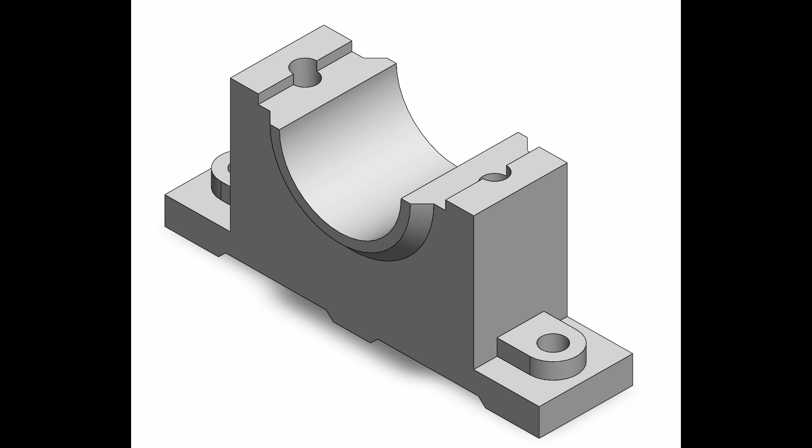Before we jump into SolidWorks, let's take a moment to understand our 2D drawing. The drawing provides three essential views: front, top, and side. These views help us visualize the part from different angles and ensure that we capture all necessary details. Pay close attention to the dimensions provided, as they are crucial for creating an accurate model.

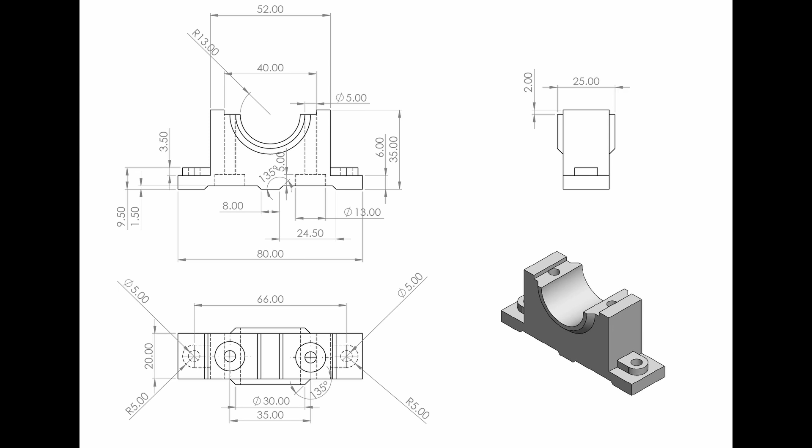Let's open SolidWorks and start a new part. Select the front plane to begin our sketch. Using the line tool, we'll draw the initial shape based on our 2D drawing. Make sure to add all necessary dimensions and relations as shown.

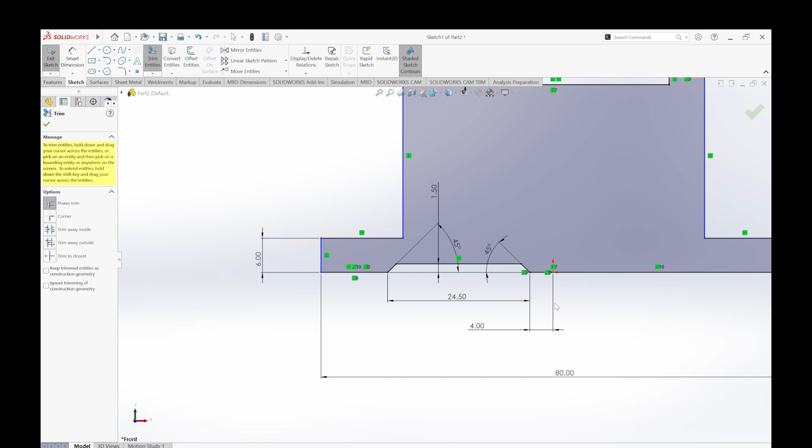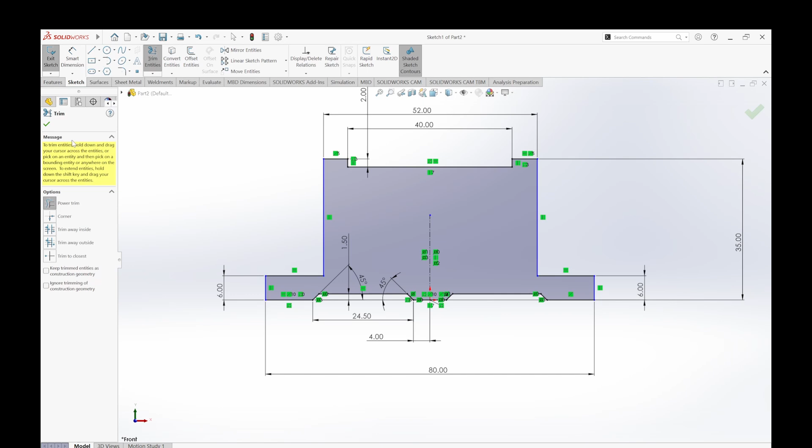To save time, we'll use the mirror feature to duplicate parts of the sketch. Once done, we'll trim any unnecessary lines to clean up the sketch. With our sketch complete, let's move to the Features menu and select Extruded Boss/Base. We'll set the thickness to 25 millimeters to give our part its initial 3D form. This extrusion will serve as the foundation for the rest of our design.

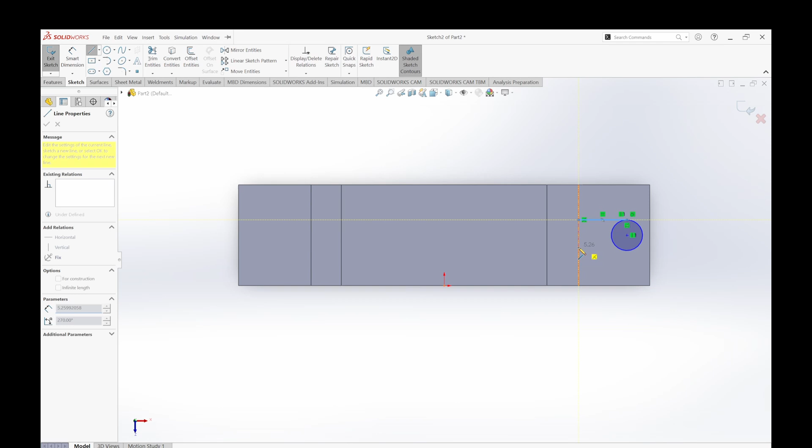Next, we'll select the top surface and sketch two circles. The larger circle will have a diameter of 10 millimeters, and the smaller one will be 5 millimeters. We'll also add two lines to complete the shape. Don't forget to apply the necessary dimensions and relations to match the 2D drawing.

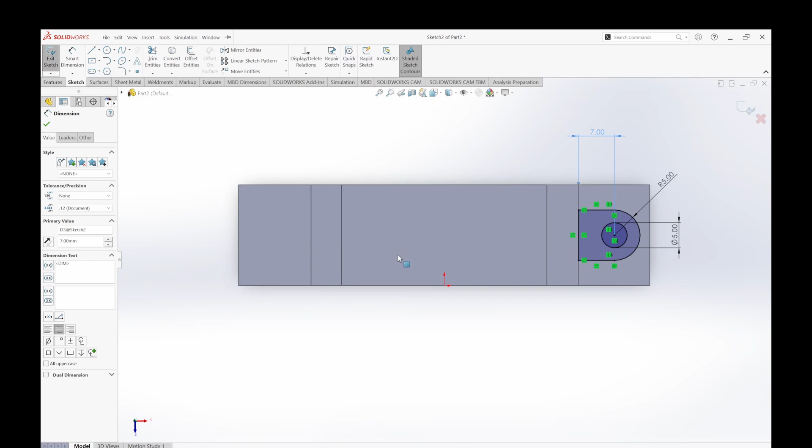Once the sketch is ready, we'll use the extruded boss feature again, this time with a thickness of 3.5 millimeters. To maintain symmetry, we'll use the mirror feature from the linear pattern menu. Select the right plane as the mirror plane to duplicate the features we just created. This ensures both sides of our part are identical.

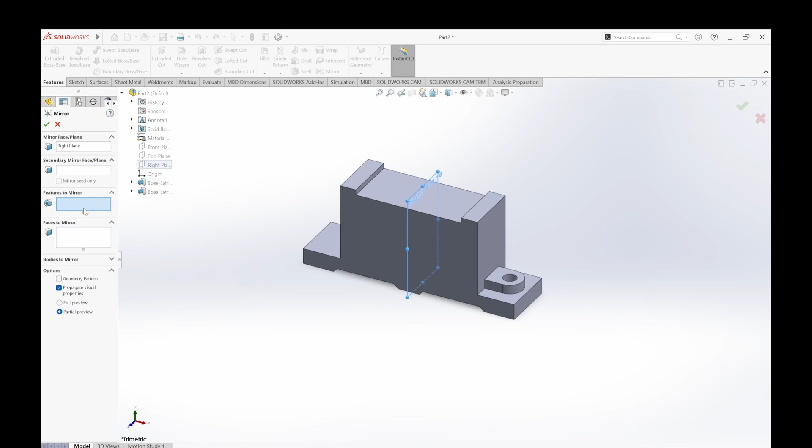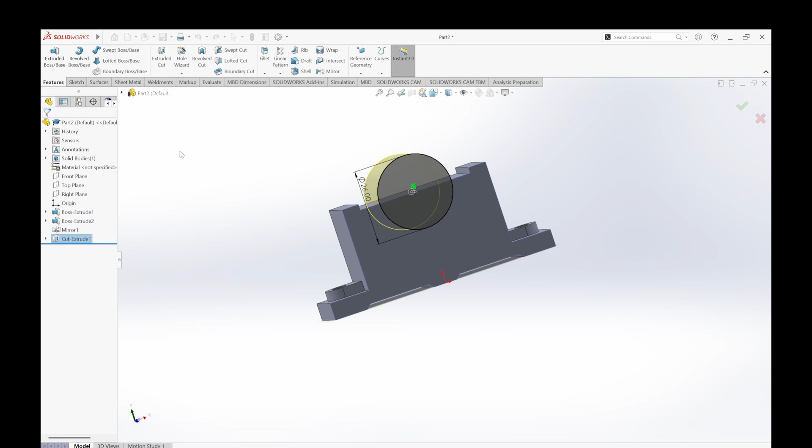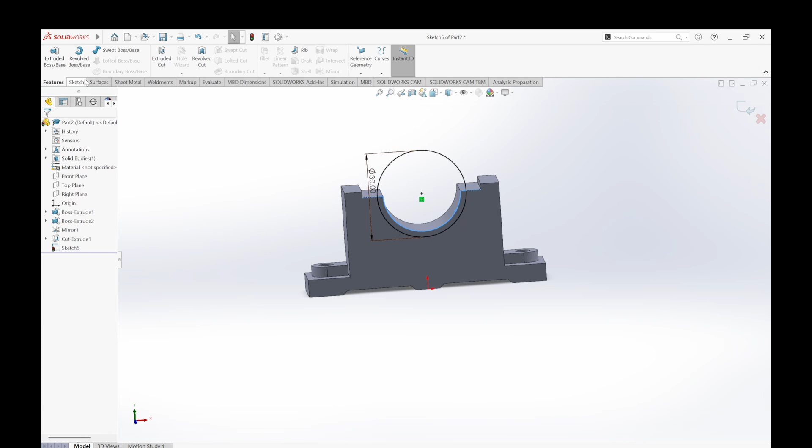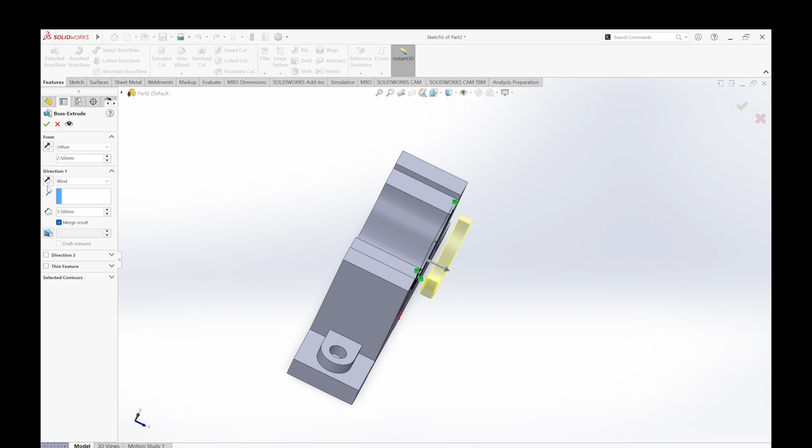and use the extruded boss feature with a 2.5 millimeters offset and 3.5 millimeters thickness. Remember to invert the direction for this extrusion. Selecting another face, we'll sketch a triangle and add the required dimensions.

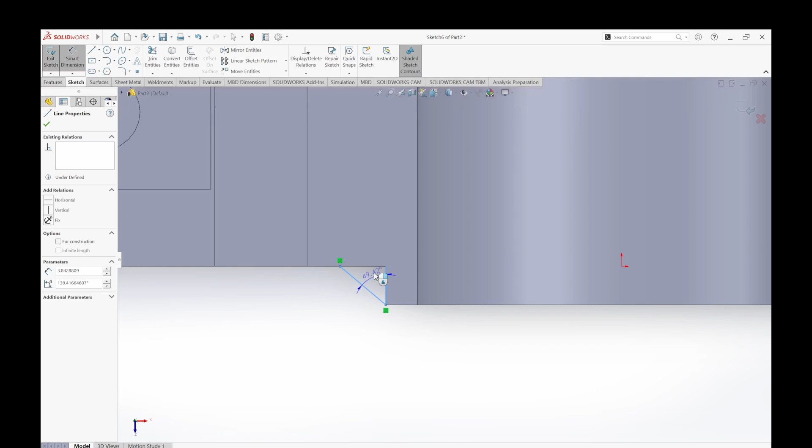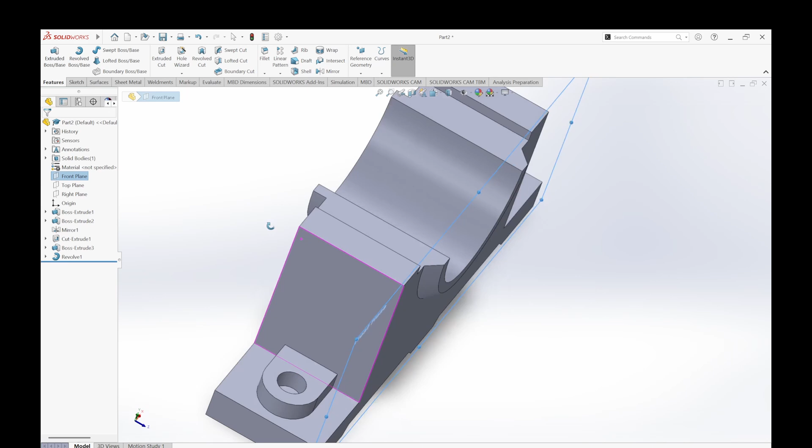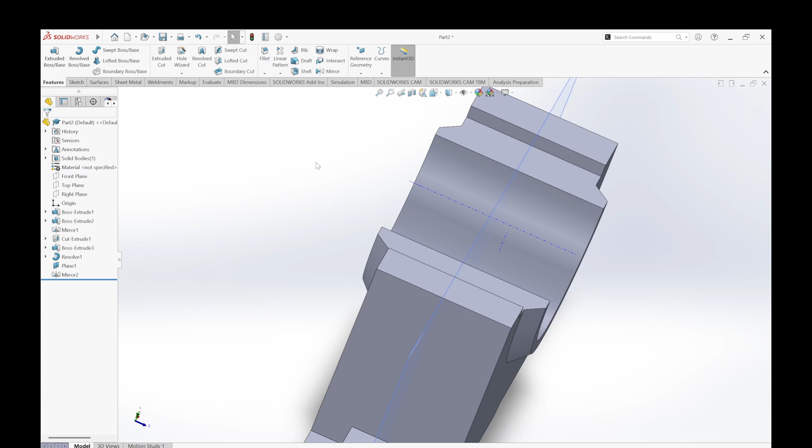Using the Revolve Boss feature, we'll create a circular 3D design by selecting an axis of revolution and setting the direction to 180 degrees. To mirror this revolve feature, we'll create a new plane 10 millimeters from the front plane using the reference geometry. Then, we'll use the mirror feature to duplicate the revolve design on the other side. Once done, we'll hide the new plane and axis for clarity.

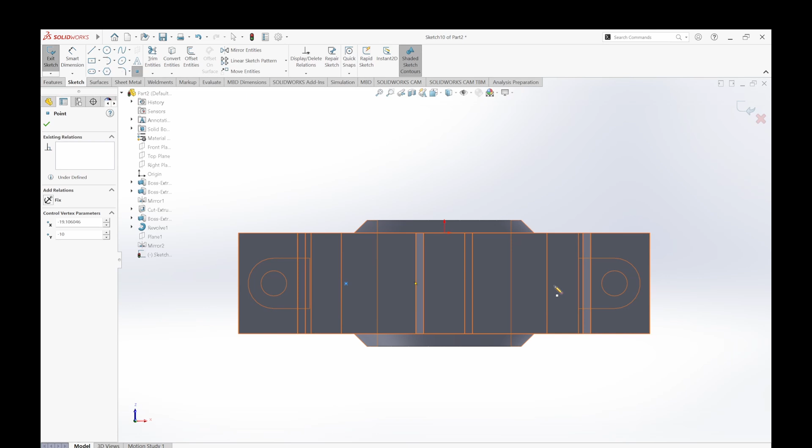Lastly, we'll add 2 points on a selected face to guide the placement of holes. Using the hole wizard, we'll choose a legacy hole type, set the dimensions, and position the holes using the points we created.

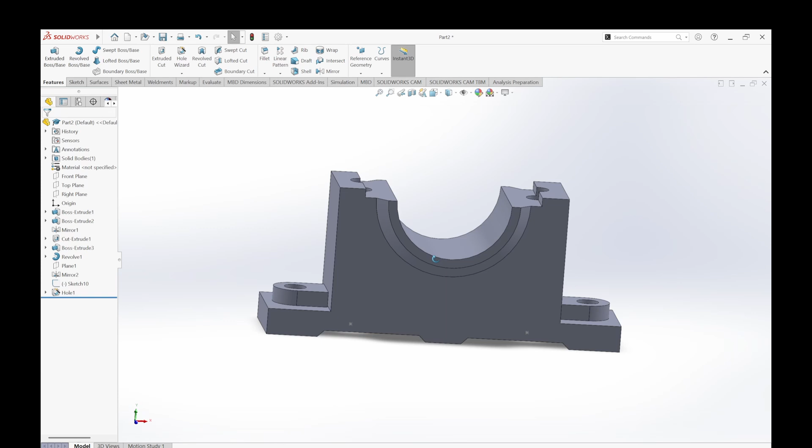If we notice any missing dimensions, we'll correct them promptly.

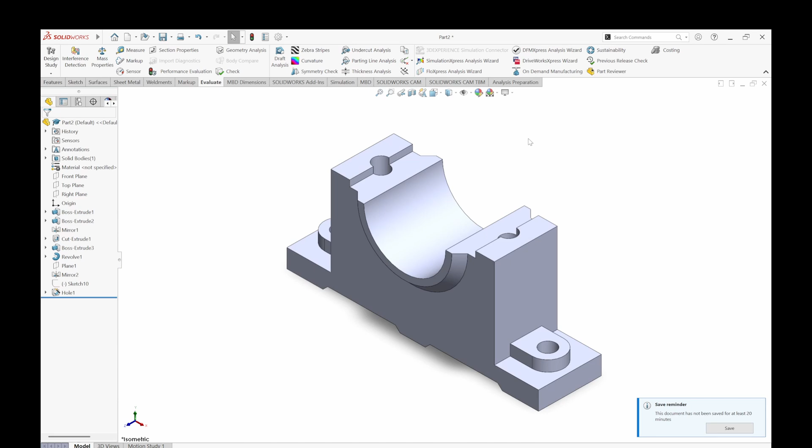With our part complete, let's add a professional touch by applying a color. This not only enhances the visual appeal, but also helps in distinguishing different features of the model. And there you have it. We've successfully transformed a 2D drawing into a detailed 3D part using SolidWorks.